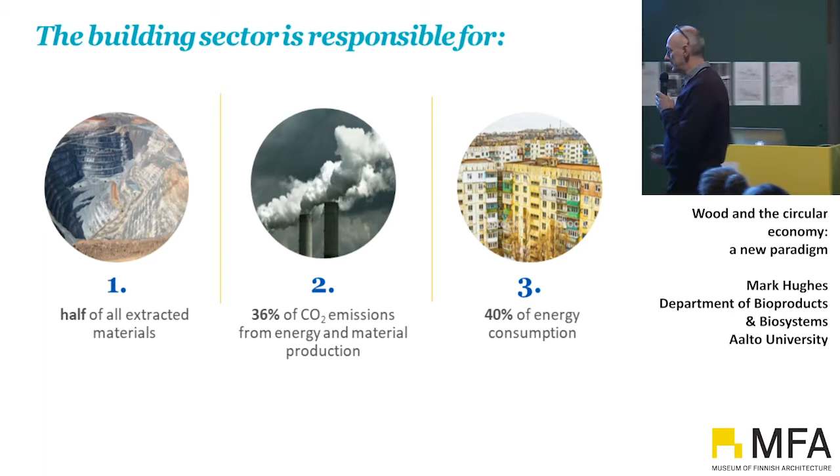It's clearly not possible. Around a third of all CO2 emissions are related to the production of energy and materials in relation to buildings, and around 40% of energy consumption. So whichever way we look at it, there's a fairly huge impact. But also, what makes me a little bit motivated about this is that there's also a huge potential to make an impact. So if we make some changes, we can actually have some fairly significant changes to the overall situation in terms of resource consumption and emissions. So that's something that I think we have to take as a positive.

Maybe you can tell from the accent, I'm not from Finland, I'm from the UK. We don't have a great tradition for wood construction there. Finland does have a great tradition for using wood, maybe not in all sectors, and we could actually do a lot to improve that. Maybe I'll touch on that a bit later. But why the interest in wood? I think from the sustainability perspective, one of the key aspects is that when we're using wood as a structural material, we're replacing another material, usually concrete or steel.

And the advantage is that with wood, you can saw wood by hand. When you come to work with metals, you can saw it by hand, but it's an awful lot more work. There's a lot of energy required in order to manufacture and process steels and concrete. So there's a lot more embodied energy, and that has a lot of carbon emission implications. So when we use wood, we can substitute for these other materials, and that has a very positive effect. The other thing is that wood is made from carbon dioxide, water, some sunlight, and some other compounds. And approximately half of the mass of a piece of wood is carbon.

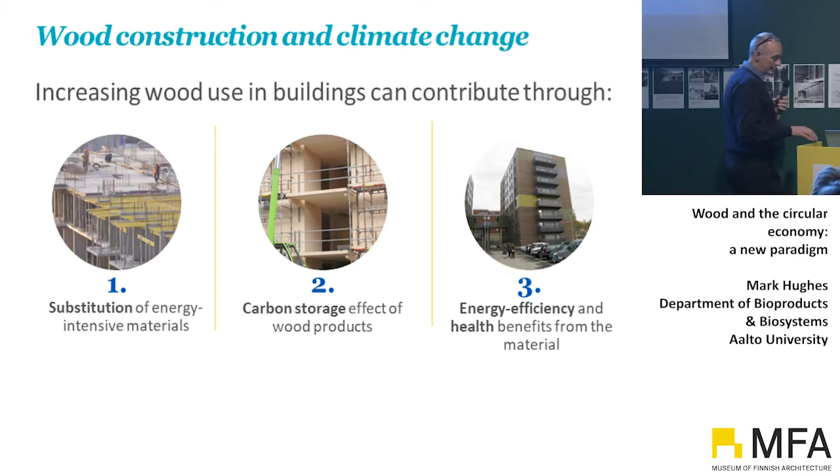And I think that's something that, certainly at Aalto, I've been talking quite a lot to many of our architect colleagues about, and I think that's a very positive story to tell. Okay. But I think that nobody really disagrees with the fact that there's a great potential to increase the climate change or the sustainability, if you like, of construction by utilising more wood.

So on the left-hand side, I should say, we certainly need some kinds of mechanisms or incentives in order to promote the use of wood in construction. It's not happening at a rate. In certain areas, residential buildings, for example, yes, it's well established, but in other areas, multi-storey buildings, for example, there's a lot that could still be done in order to promote and to roll out the utilisation of wood.

Well, we are faced with some possible problems in the long run, namely the supply shortages. We know that we have a big forest resource here in Finland with about 100 million cubic meters of wood growing annually, of which we cut and utilize something like 60 million cubic meters annually. You would think that there's a potential to increase the amount of wood going into wood products of all sorts, not just wood construction, but also paper products and chemicals and fibers and things like that. But there comes a point where we can't take more out of the forest without seriously having to think about the loss in biodiversity and the other ecosystem services.

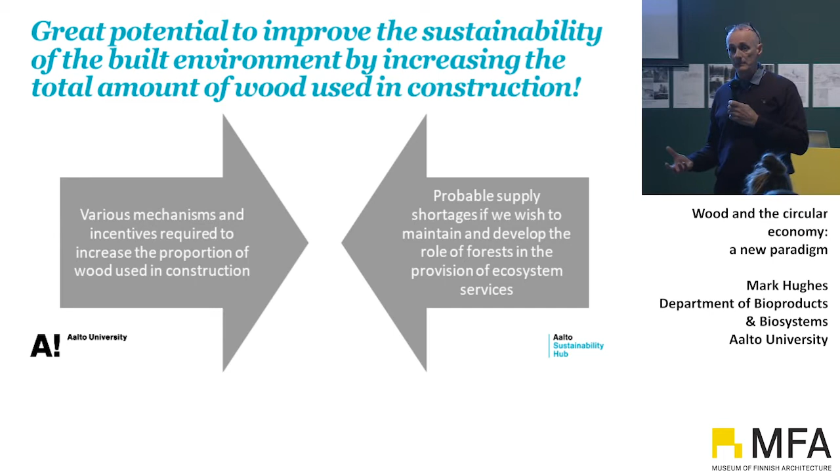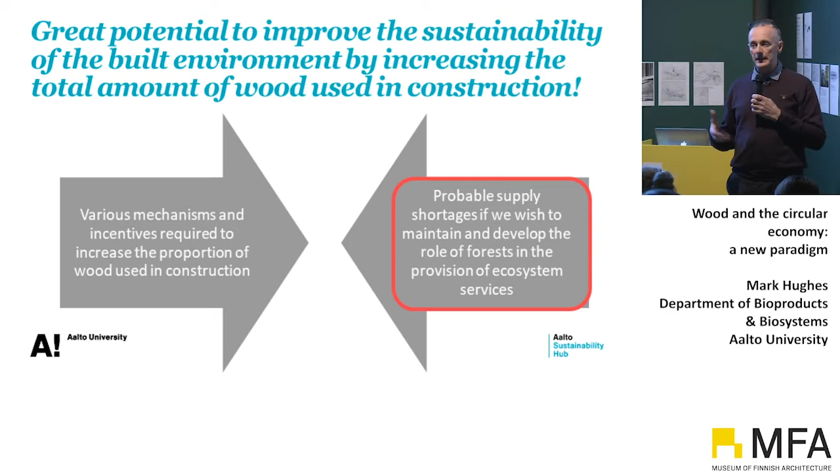And if we think about climate change and maximising the climate change potential of utilising wood, we need to think about the resource. And I think all too often we don't think enough about the resource base. Where does wood actually come from, and what are the implications of utilising wood? So we need to have this in mind, and there have been studies done to say that within the next 10 or 20 years, we're going to run into some problems when it comes to the sustainable supply of wood fibre. So the question really arises then, what can we do?

How can we, on the one hand, maximise the storage of carbon in wooden buildings? How can we maximise the benefits of substituting other materials without then compromising the ability of forests to sequester carbon from the atmosphere, act as a sink, and also to retain the biodiversity and other ecosystem services? So that's a big question, I think, that we have to grapple with.

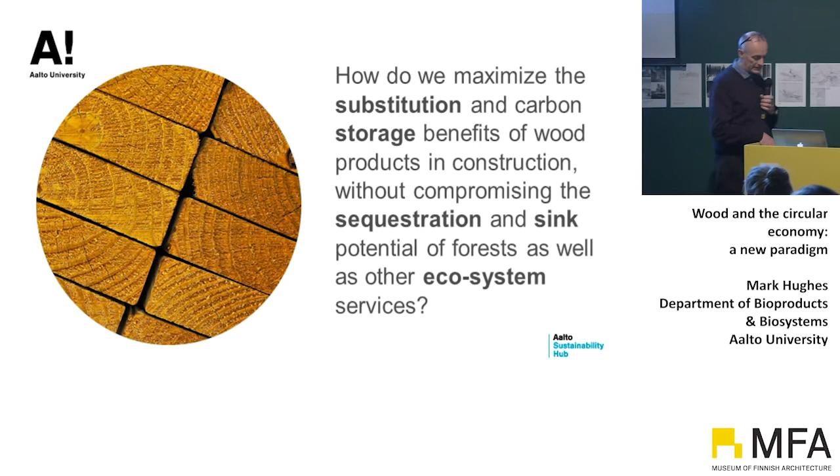And this really, I think, requires a slightly different approach to our thinking. We need to think very much at a systems level. We can't think of things in isolation. We can't just think about only the wood value chain. We can't think about only the construction. We can't think only about forestry.

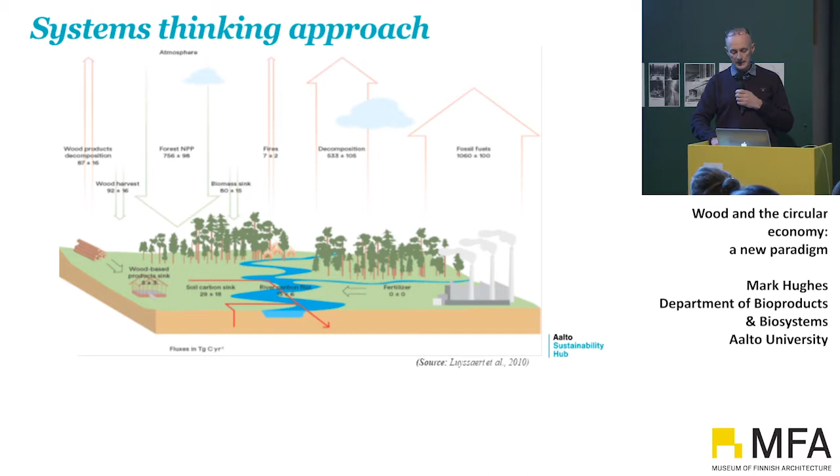We need to include all the various actors and stakeholders in this system to create a compromise and an optimized system that maximizes the potential of wood, both in the forest and in the built environment, to store carbon and mitigate climate change. So we need to think about it in this kind of systemic way. And we're now starting to approach the problem from this systemic perspective, rather than looking at single issues.

So I was talking moments ago about resource efficiency, or materials efficiency, which is where we really started this discussion. And of course, we can think about efficiency in different ways. When we think about the application to the wood value chain, we could think about the efficient utilization of the raw material. This is something that the forest industries are very good at.

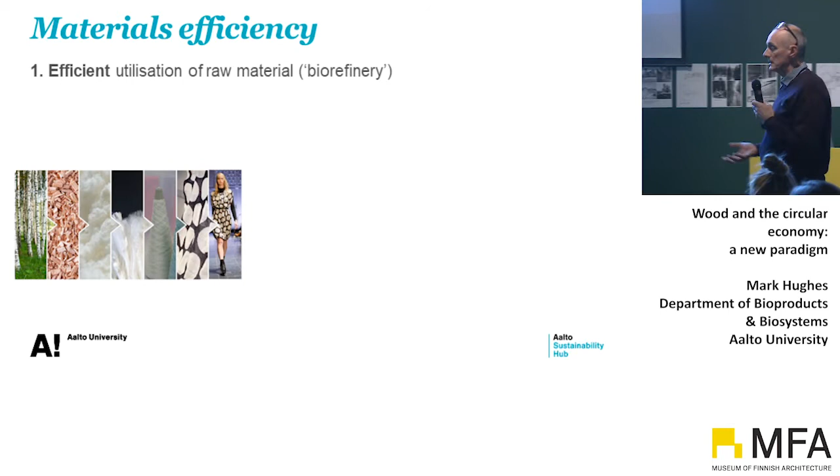So a unit of biomass, a log, can be broken down into sawn timber, it can be broken down into chips that can be used as a feedstock for making various polymers or fibers, paper products, and a whole range of different things. What's left over can be used in other material applications or to produce energy. So it's an efficient way of utilizing materials already.

There's a couple of examples here. Aalto has done a lot of work looking at producing, for example, alternative fibers to cotton and other fossil-based fibers for textiles. These are based on forest resources. So there are many ways in which we can increase the efficient utilization of biomass.

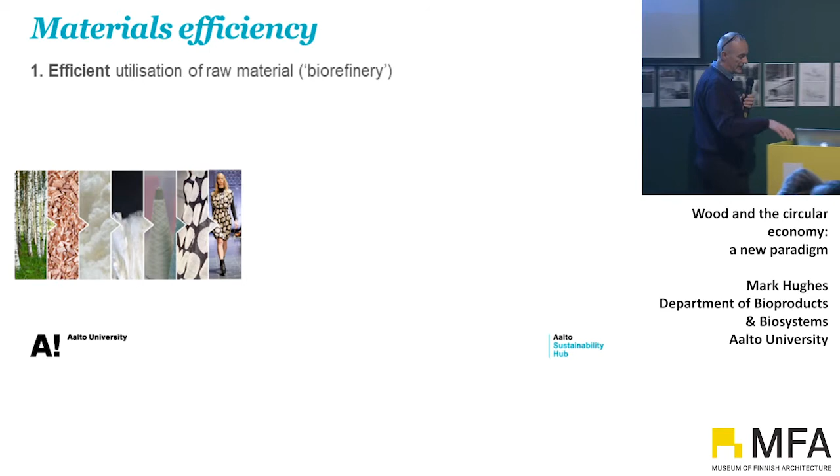The way we can look at efficiency is also through the longevity of products. So everybody says we live in a throwaway, disposable society, and I think that's true. In my, I would say short lifetime, but in my lifetime, I think we've got away from repairing things to just throwing things away. It's crazy, utterly crazy.

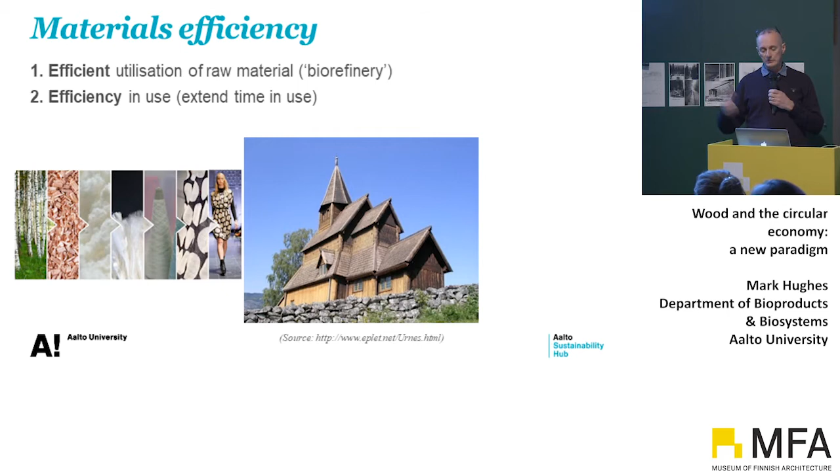And there are plenty of examples of old buildings that have been around for at least centuries, maybe even millennia. An example here of a church from Norway. It's been standing for approximately 1,000 years. So it's a good example of efficient use of material. Those trees were felled, let's say 1,000 years ago. Trees have regrown in that time, maybe 10 times over. So by having an extended use time, that has the benefit of storing the carbon for a long time and also being very efficient with the use of the raw material.

The other thing that we're certainly not very good at doing is thinking about what we do after the use of wood. So when it comes to wood that has been torn down from buildings, removed from buildings, we are usually ending up with a pile of often broken bits of wood, which are then difficult to reuse. We don't really think about the reuse. We don't actually think about reuse much in products, full stop. So most products are made without really any thought whatsoever to how we recover the materials. And some of these are very, very valuable materials. Certainly that's the case in wood.

Will you excuse me a second? I must take a glass of water.

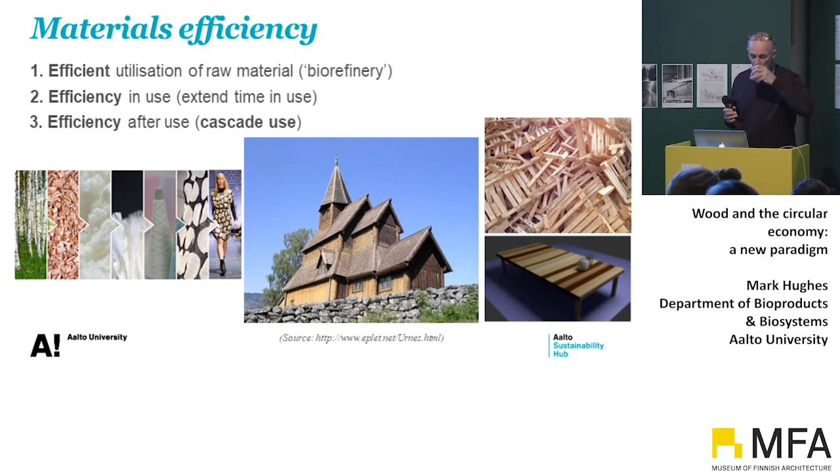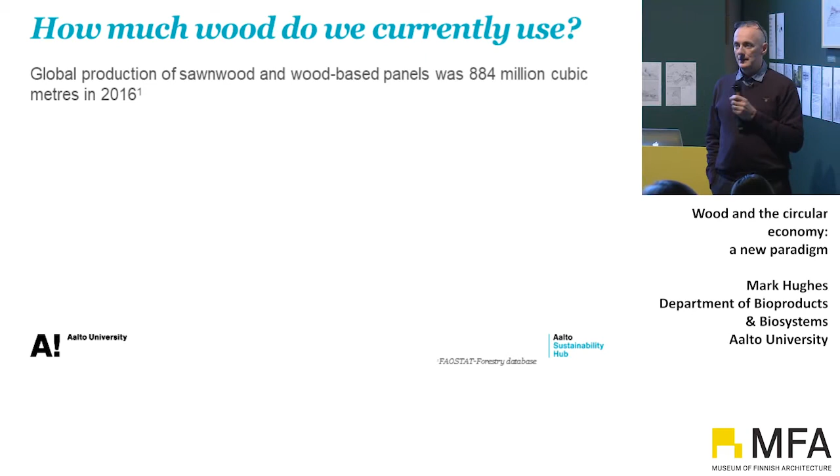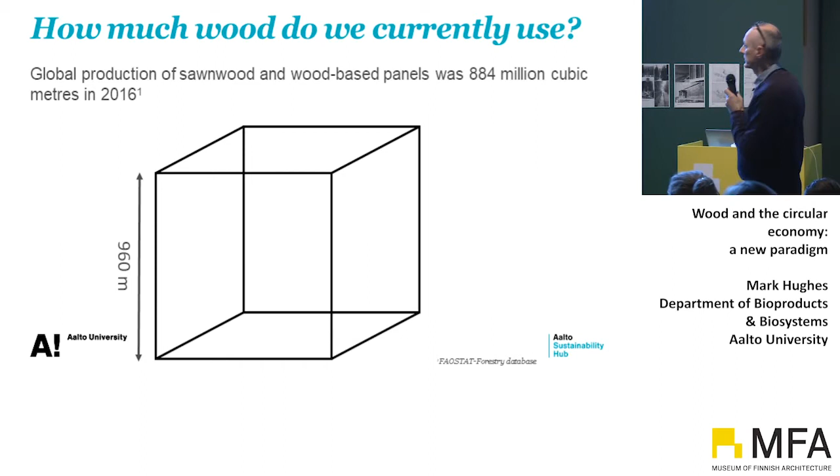Okay, so we used or produced in 2016, according to statistics from the UN FAO, about 884 million cubic meters of sawn wood and wood-based panels. To put that into some context, that's a cube of wood product approximately a kilometre tall, and as architects, you'd be interested to know you could put the Eiffel Tower 3 times on top of each other in that box. So it's a large amount of wood products being manufactured on a yearly basis.

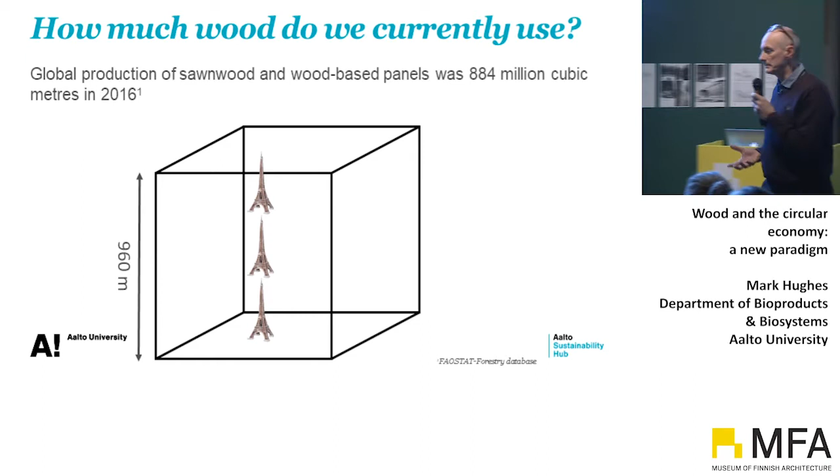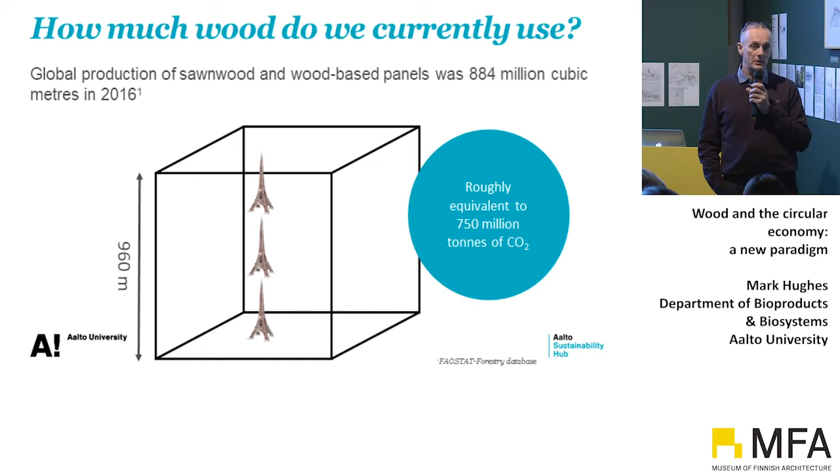Of course, not all of these go into construction, but a large proportion do. So there's a lot of wood material actually going into buildings on a regular basis, and of course other products. That is the equivalent to about 750 million tons of carbon dioxide. So that wood that was manufactured, removed from the forest, you could argue that removing it from the forest you're creating an environmental problem, but in the sense that you are retaining the wood in solid form, in material form, and placing it into a building, you're storing the carbon there, and you're substituting other materials that would otherwise be used if you weren't using wood.

So we could think of the built environment of buildings as a little bit analogous to the forest. It's a kind of a resource, it's a store of materials. So it's a kind of an urban forest, if you like.

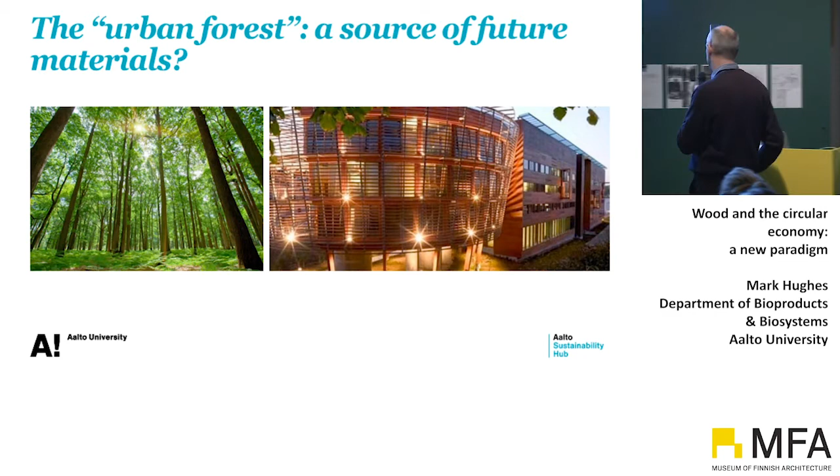How much is actually available? Well, we've been involved in a few studies, and actually from a study that was conducted from a European project in which we were involved, which finished a couple of years ago, approximately 32 million cubic meters of solid wood is present in residential buildings in Austria alone.

I haven't put anything on the slides here because I've only just had the thesis, but I've had a student working with me now for the past 6 months, and she's been looking into the potential amount of wood here in Finland in residential buildings, and the value that she came up with was 17.1 million cubic meters. So there's a lot of wood actually embedded in the building stock at the present time. 17.1 million cubic meters is a very significant amount of material.

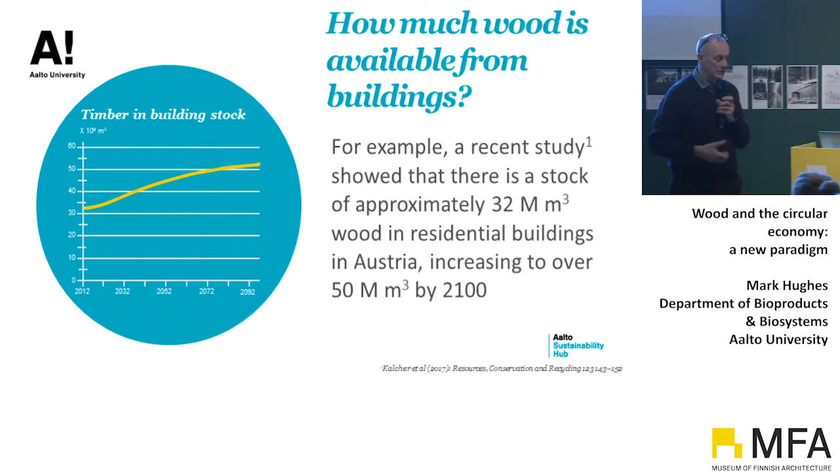So why don't we use it? Why don't we actually make use of this? And the prediction here for Austria, and I think when we look into it, we'll probably find the same will happen here in Finland, is there's an expectation that that amount of material will increase, and so there'll be an increasing amount of material available to be utilized in the future.

So one of the concepts we've been working with, and I'm sure Satu will also be talking about this, is resource cascading. The concept here is, rather than to lose the quality or the value of a material simply by disposing of it, you retain the value or the quality by reusing it either in other identical applications or in other applications that have a high quality requirement.

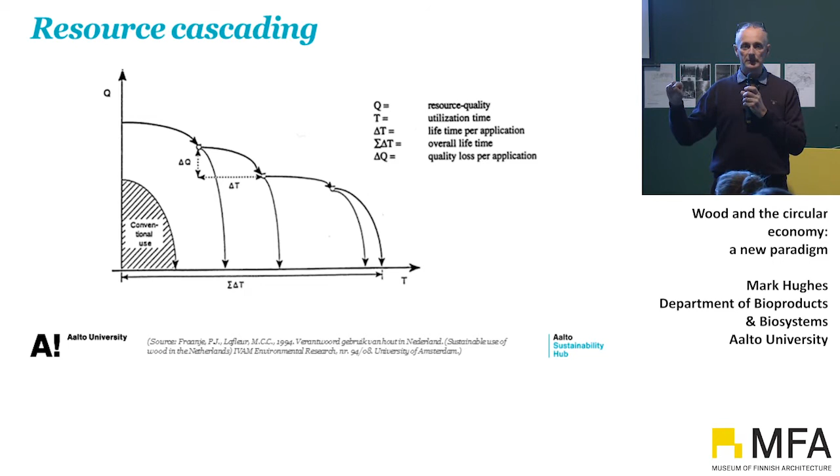So rather than, for example, using a piece of sawn timber and then just chipping it up and putting it in the fire, you retain it in the solid wood form to make another maybe load-bearing element or another interior panel or whatever it might be. It retains a higher level of quality for a longer period of time. And you can repeat this in a cascade until eventually, by the time you've reprocessed it several times, the quality has been lost and there's not much else you can do with it, but you have had a lot of use out of that material throughout that time.

So this is the concept of cascading. Here conventional use, what we do currently mostly, is we have a material, we use it once or twice or whatever it is, and then throw it away. The idea with the cascading is that we extend the period of time so the quality is retained for longer. So if you think about carbon storage, we retain more carbon for a longer period of time, therefore we have a more efficient use of material.

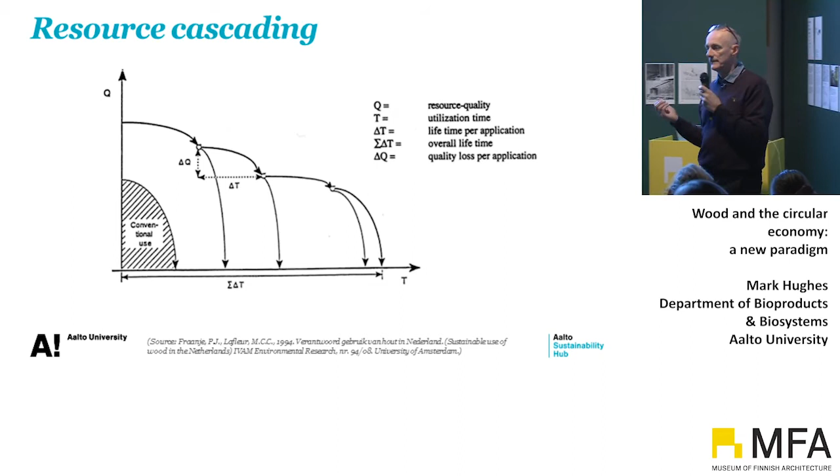So you might tell an example of product whose service life would be extended.

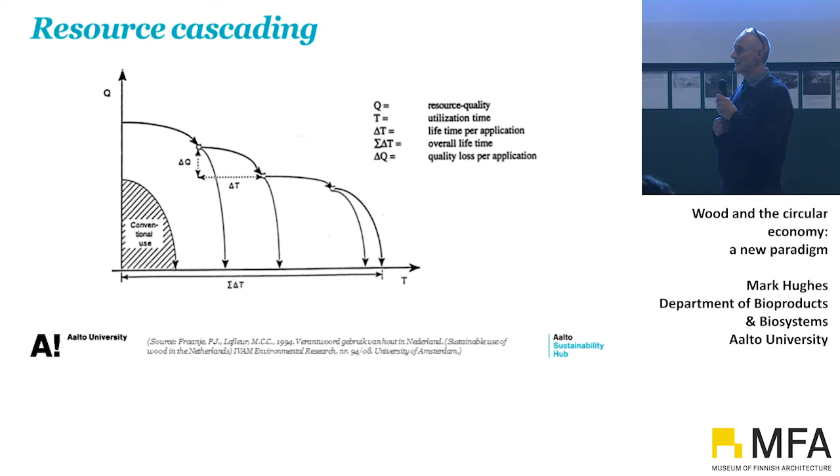You preempted my next slide. Sorry, I'm already. You're always doing that. I know.

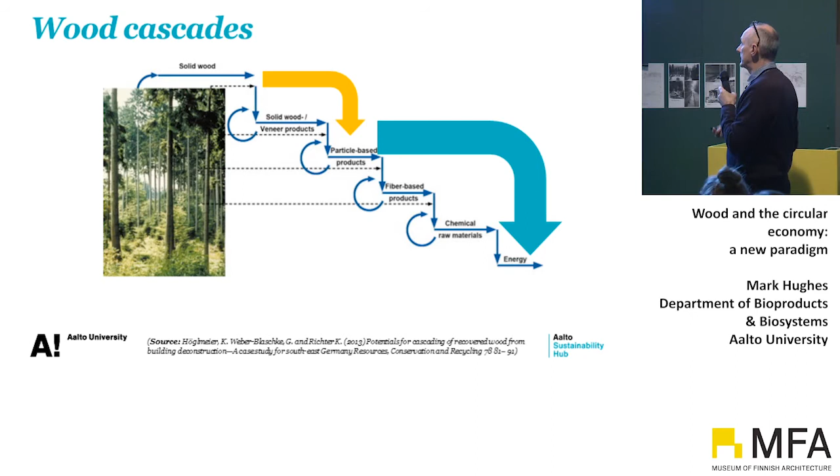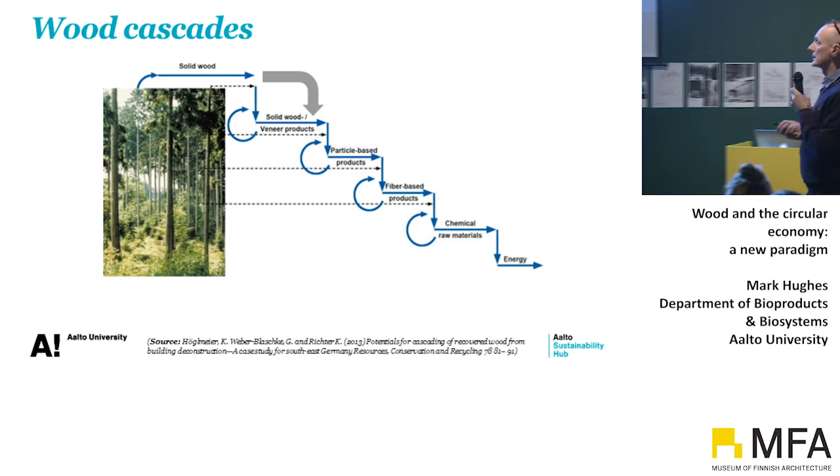What we would like to see really is actually another step where, first of all, the recovered wood would be utilized in a solid wood form before being converted into particle board and eventually burned. We may be able to put another couple of steps in there as well, but I think realistically, if we could go from solid wood to another solid wood application and then to particle board and then finally for energy recovery, we would still have an important positive contribution to make.

So in short, I think everybody's familiar with the terms reuse, reprocess, recycle, recover, reduce, reuse, recycle. It's well known. So if we could reuse components from buildings, either in the existing form or in slightly modified form, that would be an ideal situation. If we can't do that, if we could do minimal reprocessing to enable the material to be reutilized in solid wood form, that would be great. If we can't do that, there'll be fractions that we can't recover in the solid wood form. We could then recycle that into particle board, or use it finally for energy recovery. So we're trying to ideally create more circularity into the system.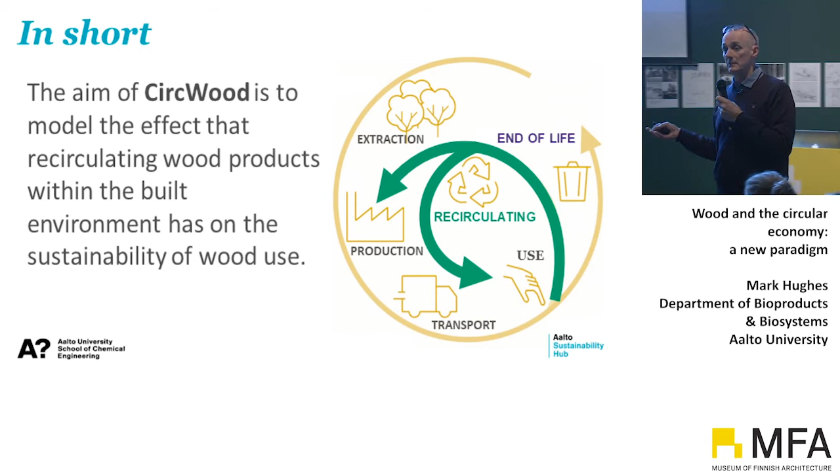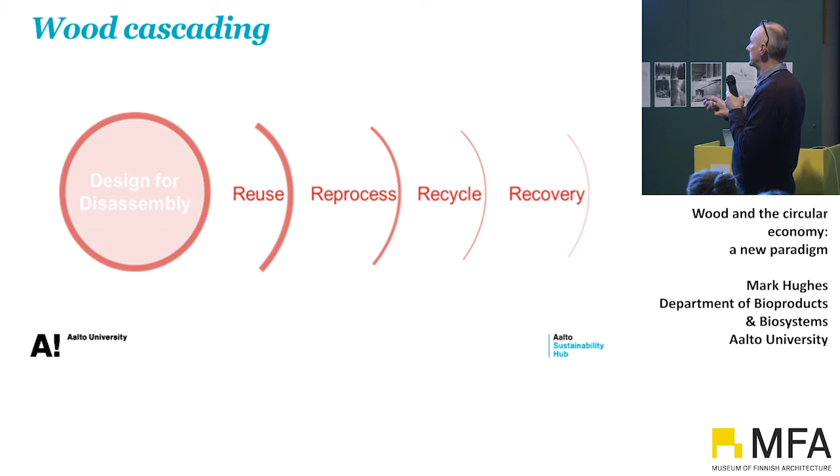It's challenging because it's difficult to assess what the current practices are, because they vary quite a lot, and what would smart demolition practices actually look like. And as for design for disassembly, we've really got very little clue about what that would mean in reality. So the idea would be to see what would happen if we could shift the emphasis from this end of the spectrum more to the reuse and the reprocessing end of the spectrum by the introduction of a design for disassembly paradigm.

I think I probably stated this already, but of course current demolition practices aren't really compatible with material recovery. They're compatible with quickly demolishing the building so that it can be moved on to the next phase, which is usually or often rebuilding another building on the same site.

So we have another project that we are now working on. We're actually entering the third phase of this other project called ReWood.

So I'm not very imaginative with names for projects. And actually this is ReWood 3 we're on now. This is ReWood 2, and we had a ReWood 1. So not very imaginative. I'm an engineer, so that's my excuse.

But what would happen if we could actually design buildings that could be disassembled, or maybe not disassembled? We're not talking about disassemblable buildings. We're talking about buildings where we can recover the materials and they can be reused. Not a modular building that is rebuilt somewhere else, but a building where we can recover the materials and reutilize those materials. So we're now working on putting together a project where we will actually build a building, and I am working with architects on this.

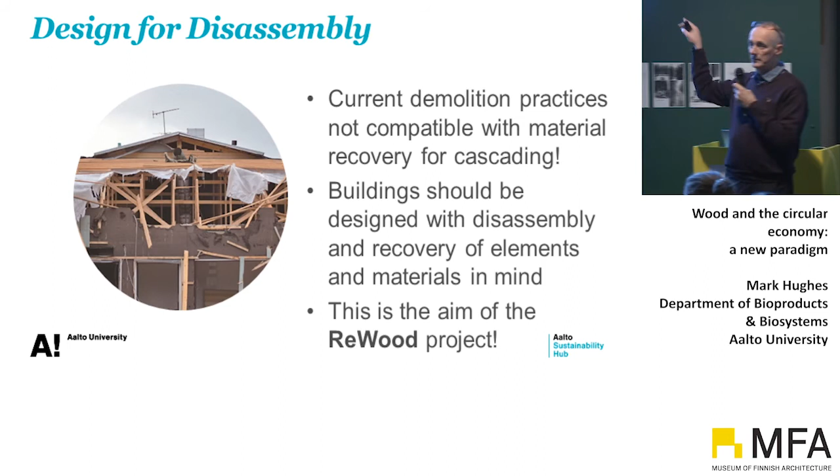We will build a building that will then be dismantled, and the materials will be given as a starting point to a new set of architects who will then build another building from those materials. It won't be the same building, but something else. And we will learn that process. That's our aim, that we will learn by it, because we don't know how to do it, and we need to learn by the experience. So this is something that we are now working on. We have a concept. We had a workshop a couple of weeks ago to scope out what this building will be and what it might look like.

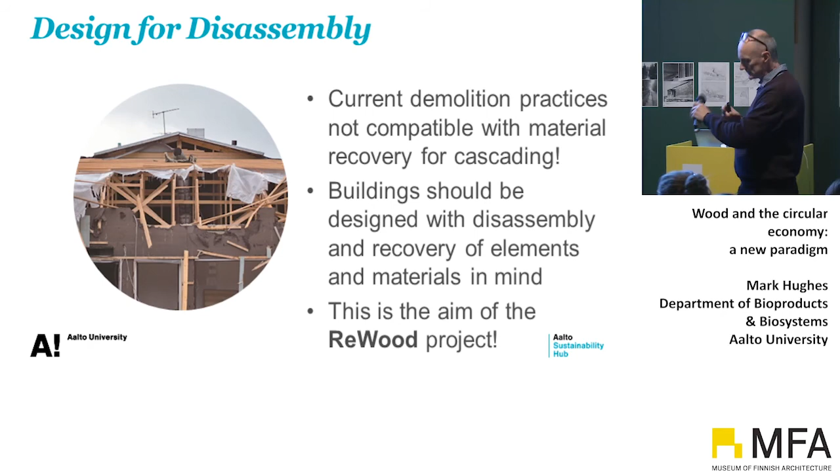So I'm going to actually close now. I'm just going to mention the projects that we've got running, because they might make some connections here. We have a project called the GoWood project. This is funded by Climate-KIC. Some may be familiar with the EITs, the European Institute of Technology, KICs, Knowledge and Innovation Communities.

We have a project where we're working in conjunction with, again, the Ministry of Environment, Sitra, UNFCCC, to look at digital technologies and the use of digital technologies to account for the carbon. The reasoning here is that if we can say with some precision what the carbon content of this building is, and if we make decisions about the building choices, design, what implications that would then have on the carbon content, then that would help us create incentive mechanisms that would help support the utilization of wood and roll out the use of wood construction.

We have another project, again funded by Climate KIC, where we're working with partners in Sweden and Switzerland to look at developing a tool that would allow stakeholders, designers, architects, decision makers to make decisions about the materials that they use in buildings to enable them to select what the most sustainable choice would be. Often we believe it would be wood. It might not always be, but it would allow them to make a kind of an informed decision about the sustainability of the building.

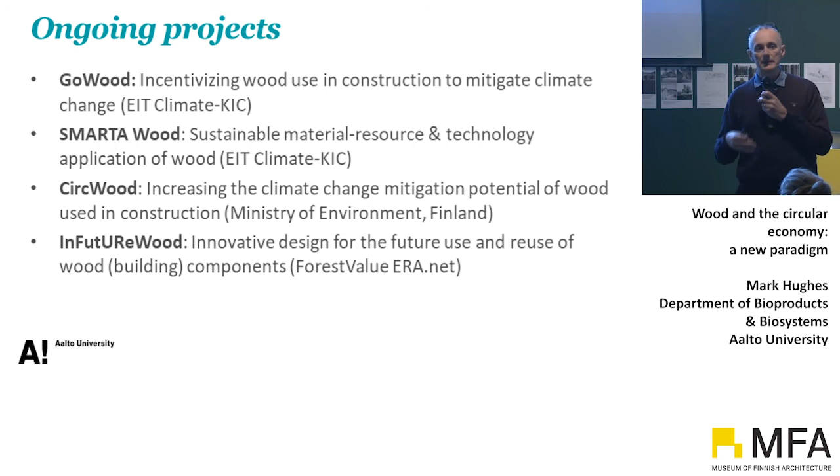CircWood I've just mentioned. I won't talk about that. And we have another project InFutUReWood, which is European. We're looking at the resource base of materials in Europe, wooden resources in Europe, and how we can harness these to create new buildings. Looking at design for disassembly as a means to enhance the recoverability of the wood materials. And then the ReWood I've mentioned.

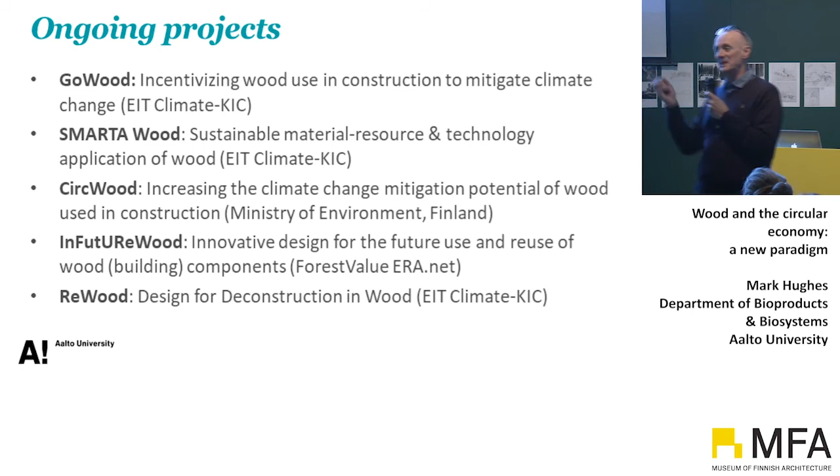Lots of acronyms, not very imaginative. All have got wood in them, haven't they?

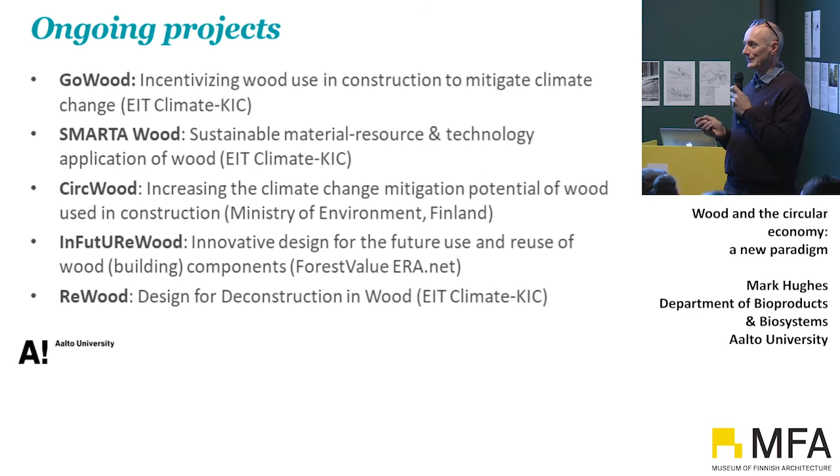Yeah, okay. So anyway, those are the projects that we're working on at the moment. If there's an invitation at a future point, I would be happy to come back and tell you more about these projects as they continue. So I think I'm more or less out of time. I managed 25 slides and it's lasted quite a long time already. Just some final thoughts, or maybe aspirations, if you like.

I think it's certainly important as we go forward that we need to adopt systems thinking. We need to involve all stakeholders. And I'm an engineer, I'm a scientist. I'm used to being in a laboratory by myself or with a few colleagues, not really thinking too much outside that realm. But it becomes increasingly important that we involve all stakeholders in this process, because there is always the danger that, okay, let's all make wooden buildings, and then suddenly we find we've run out of forest. That's not really a very good situation to be in.

Thinking about this kind of materiality of products, then thinking of buildings as material stores. I know this is already changing, and there are very good examples of projects that are looking at buildings as material banks. I think this is something that maybe we need to think more about. Yes, it's somewhere that we have as a space to live or work, but also how can we think about the materials that actually go into the construction to retain those and to give them value. I think materials need to be given value.

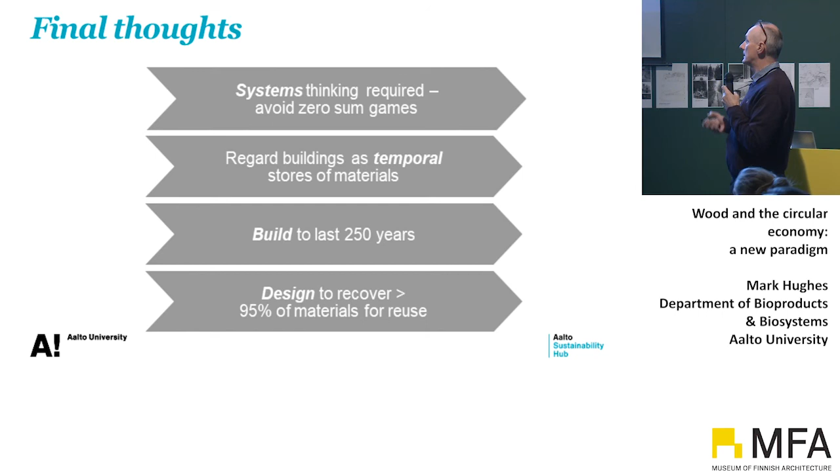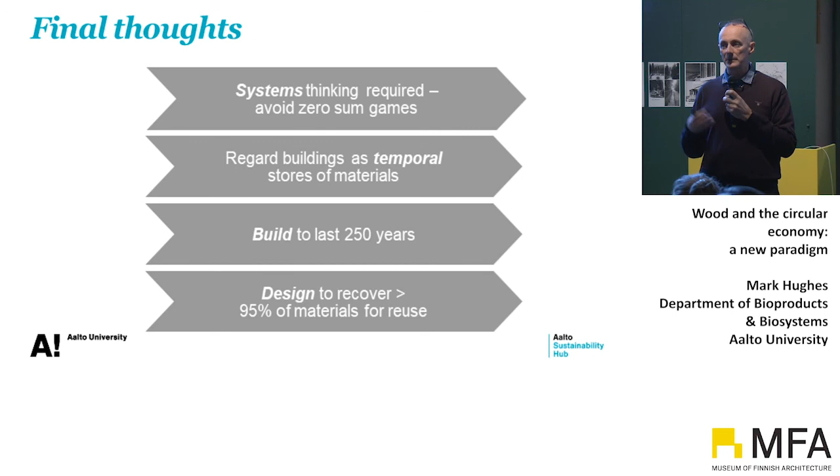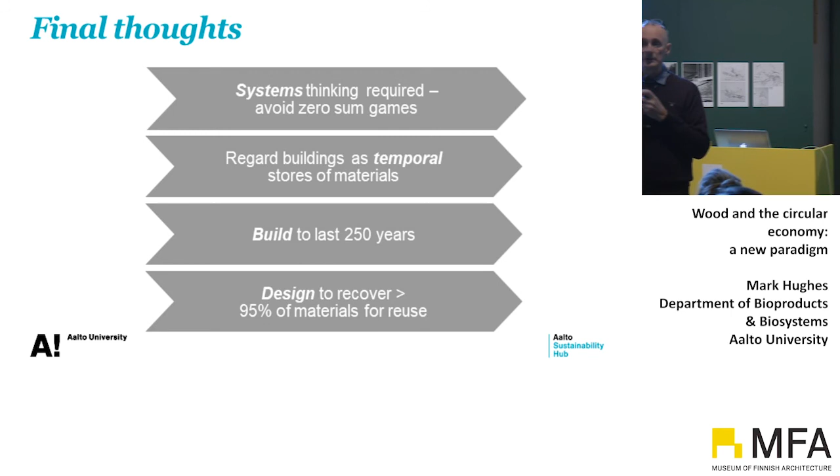And certainly we should be thinking too about designing buildings where we can recover the majority of the materials. And I have to admit, a lot of products we use that go into buildings are actually quite complex. It makes it very challenging to actually recover the materials in the first place. So we maybe need to go back also to the point of the manufacture of the products, to think about how they could be produced in a way that would make the recovery of the materials much easier.

Very happy if anybody would like to make contact. Really happy to talk more about this. I'm always looking to engage, particularly with architects, to get their opinions; you might think a lot of what I've said is a load of rubbish. I don't know. We certainly need to work with stakeholders to try to understand what the issues are, what would help to promote the utilisation of wood, and also this additional part of the circularity, the resource efficiency with wood construction. So, with that, thank you.